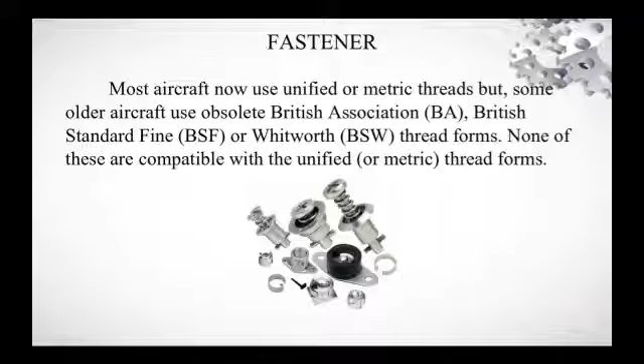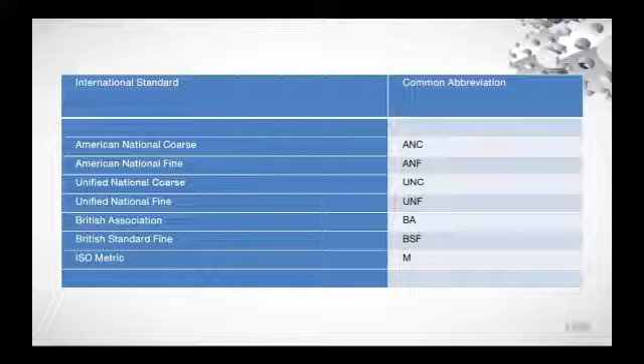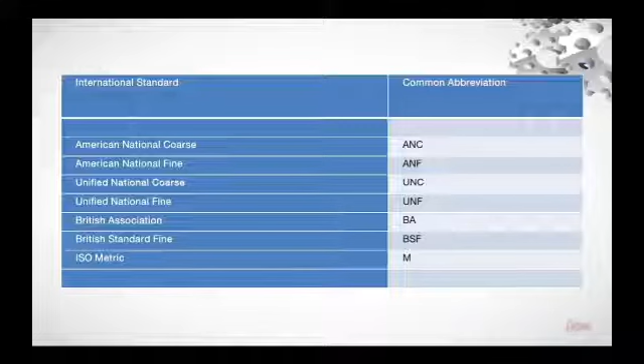Di bawah ini ada jenis-jenis standar dari thread. Yang pertama American National Coarse, American National Fine, Unified National Coarse, Unified National Fine, British Association, British Standard Fine, dan yang terakhir ISO Metric.

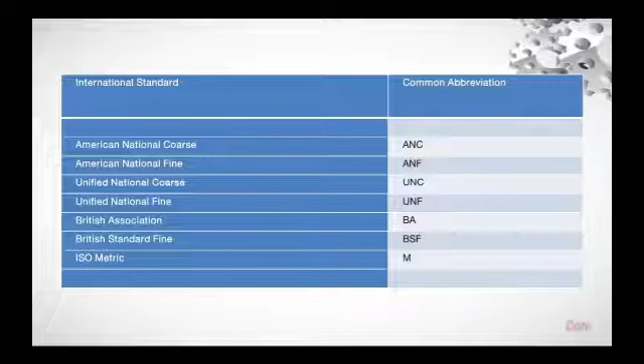The inclined plane and the helix. The value of the inclined plane as a means of transmitting motion is well known. Most aircraft components are assembled using fine threads on the various bolts, nuts, screws, and studs, which are then often further secured by some other mechanical process to reinforce their resistance to the effect of temperature change and vibration.

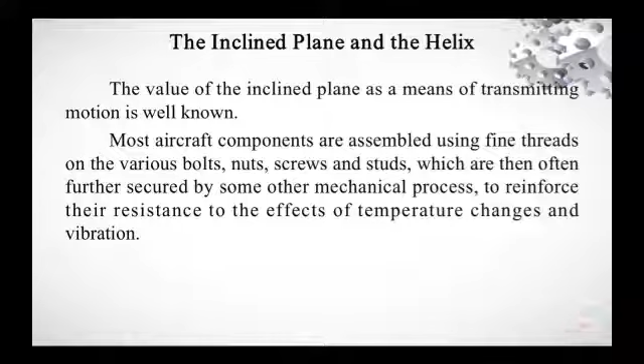Screw thread terminology. Screw threads are usually formed with clockwise turning, atau yang biasa disebut searah dengan jarum jam, and are referred to as right hand threads, menggunakan atau disebut right hand threads.

But there are occasions where the thread is formed with the groove spiraling in anti-clockwise direction, and in this instance they are designated as left hand.

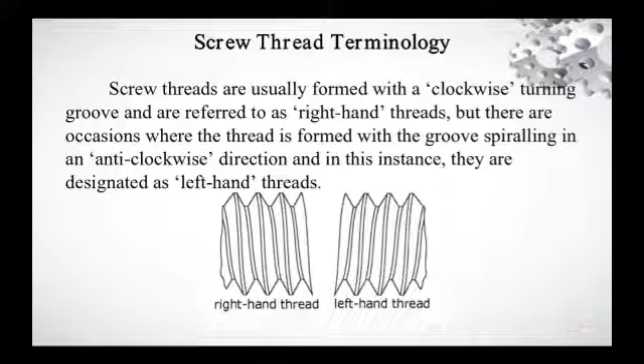Jadi ada dua jenis dari thread. Yang pertama itu clockwise dan anti-clockwise. Biasanya clockwise itu disebut dengan right hand thread dan anti-clockwise itu left hand threads.

Kemudian the following terms are used to define the characteristic of the thread. Jadi di bawah ini saya akan jelaskan bagian-bagian dari karakteristik thread tersebut. Screw thread, a ridge of uniform section in the form of a helix on the external or internal surface of a cylinder, or in the form of a conical spiral on the external or internal surface of a cone.

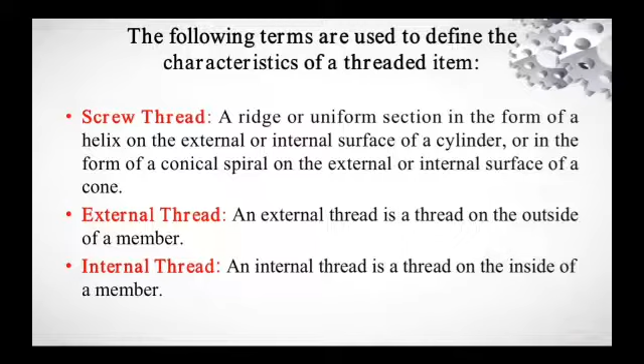External thread. An external thread is a thread on the outside of a member. Internal thread. An internal thread is a thread on the inside of a member.

Kemudian major diameter. Major diameter adalah the largest diameter of the thread of the screw or nut. The term major diameter replaces the term outside diameter as applied to the thread of a screw, and also the term full diameter as applied to the thread of a nut. Jadi major diameter ini adalah bagian terbesar atau ukuran diameter terbesar dari nut atau screw. Karena diameter itu terbagi dua, major dan minor.

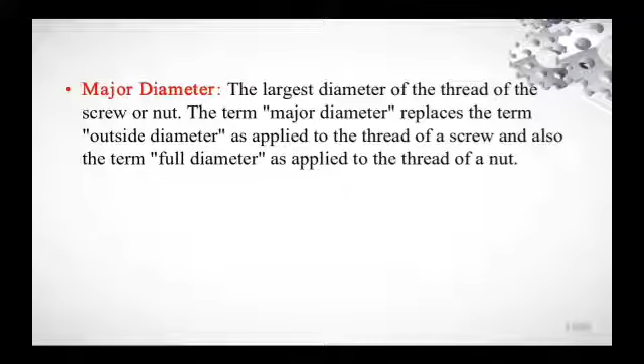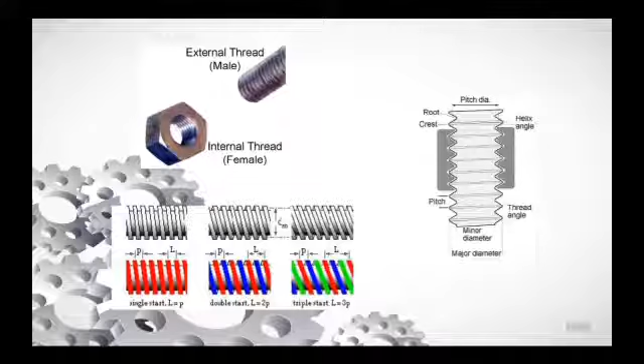Kemudian next. Minor diameter, the smallest diameter of the thread, measured at a right angle to the axis. Pitch, the distance from the center of one crest to the center of the next, measured parallel to the axis.

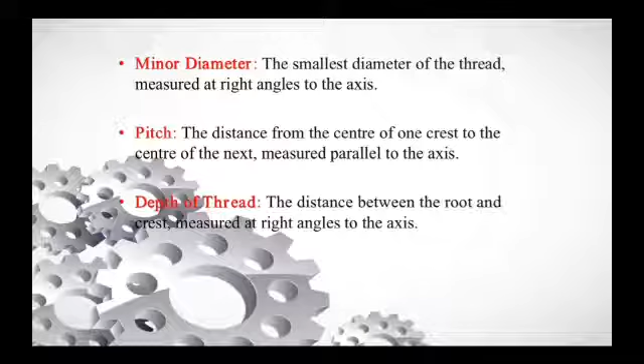Depth of the thread, distance between the root and the crest, measured at right angles to the axis. Half angle of the thread, atau biasa disebut the angle included between a side of the thread and the normal to the axis, measured in the axial plane.

Angle of thread, the angle included between the sides of the thread, measured in the axial plane. Helix angle, the angle made by the helix or conical spiral of the thread at a pitch diameter with a plane perpendicular to the axis.

Oke, bagian selanjutnya akan dijelaskan oleh Arvidi Ronofri.

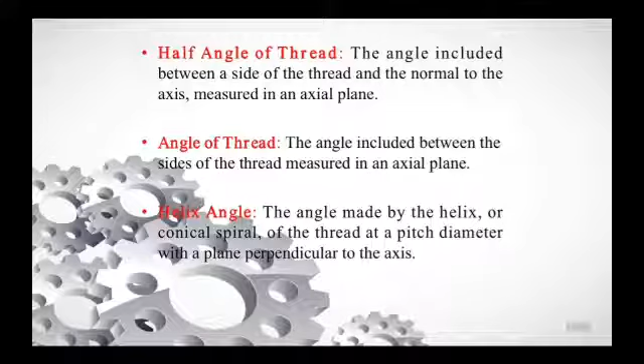Yang saya lanjutkan, selanjutnya itu ada crest. The surface of the thread corresponding to the major diameter of the screw and the minor diameter of the nut.

Terus yang selanjutnya ada lead. The distance a screw thread advances axially in one turn. On a single thread screw, the lead and pitch are identical. On a double thread screw, the lead is 2 times the pitch. On a triple-head screw, the lead is 3 times the pitch.

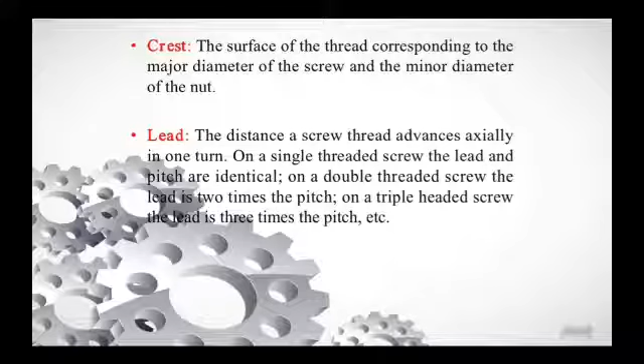Next, root. The surface of the thread corresponding to the minor diameter of the screw and the major diameter of the nut. Side or flank. The surface of the thread which connects the crest with the root.

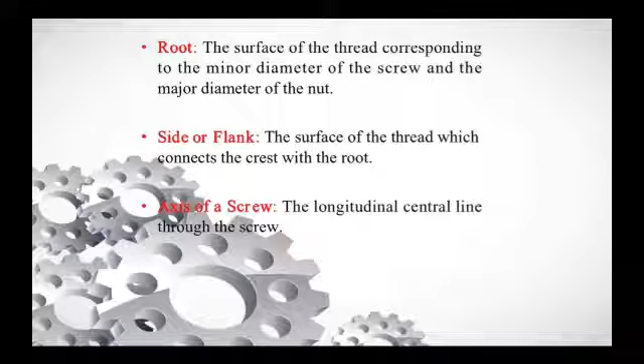Next, axis of the screw. The longitudinal central line through the screw. Base of thread. The bottom section of the thread, the greatest section between the two adjacent roots. Depth of thread. The distance between the crest and the base of the thread, measured normal to the axis.

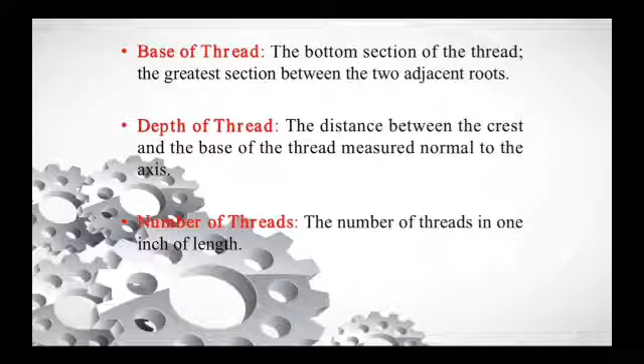Number of thread: the number of threads in 1 inch of length. Length of engagement: the length of contact between two mated thread parts measured axially. Depth of engagement: the depth of thread contact of two mated parts measured radially. Lead: the distance a screw moves axially in one complete turn.

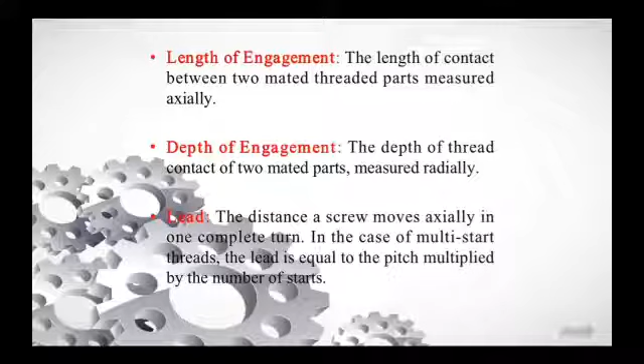In the case of multi-start threads, the lead is equal to the pitch multiplied by the number of starts. Single start thread is the term used when there is only one screw thread cut in the material. Multi-start thread consists of 2 or more separate parallel threads cut into the material, carrying the thread run out, which is the part of the thread where the minor diameter increases until it equals the major diameter and merges with the plain portion of the shank.

Di bawah ini ada sedikit rumus. Note that lead atau L sama dengan pitch P dikali start.

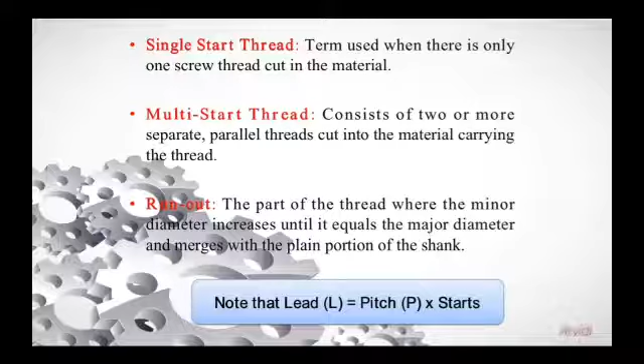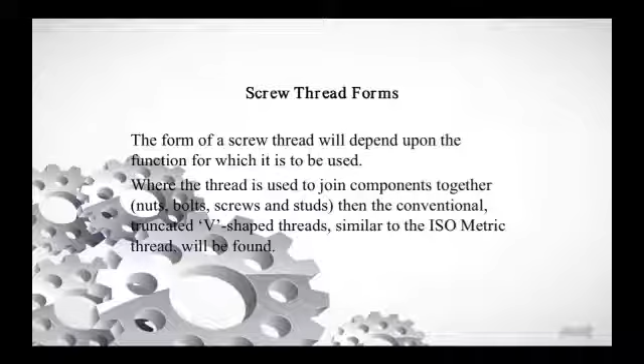Selanjutnya ada screw thread forms. The form of screw thread will depend upon the function for which it is to be used, where the thread is used to join components together, example nuts, bolts, screws, and studs. Then the conventional truncated V-shaped threads, similar to the ISO Metric thread, will be found.

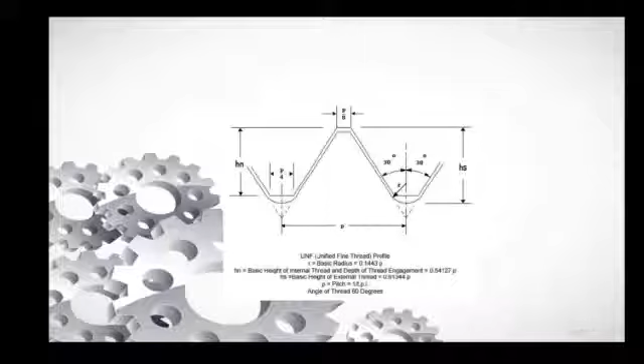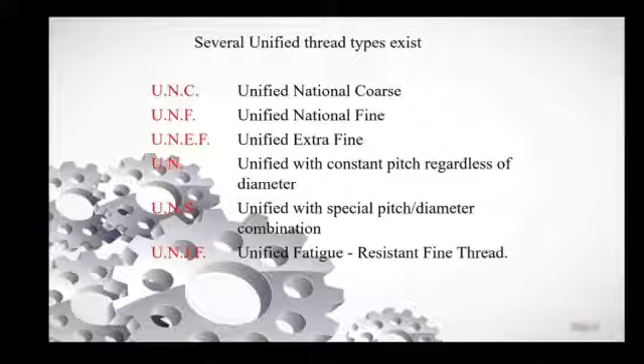In an attempt to provide a common standard, Canada, the United States of America, and the United Kingdom adopted the Unified System of Thread. Several Unified Thread types exist: Unified National Coarse, Unified National Fine, Unified Extra Fine, Unified with constant pitch regardless of diameter, Unified with special pitch or diameter combination, and Unified fatigue resistant fine thread.

Other thread forms. Some specialist threads are used whenever force needs to be transmitted, such as in a lead screw or a vice. These include the following.

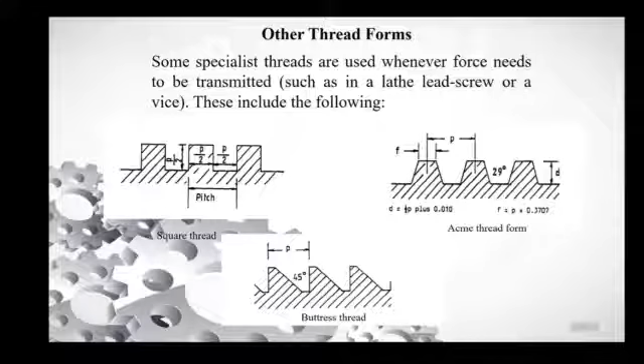Classes of thread. The different thread classes have differing amounts of tolerance and allowance. Classes 1A, 2A, 3A apply to external threads. Classes 1B, 2B, 3B apply to internal threads.

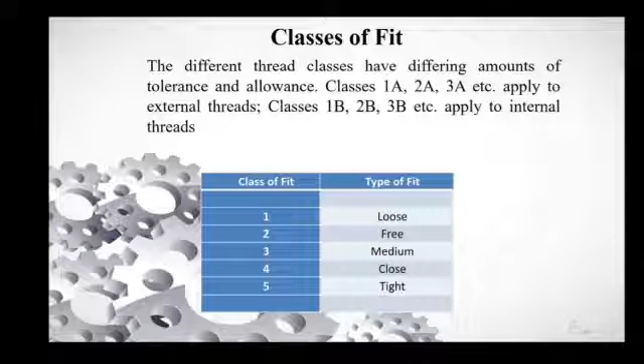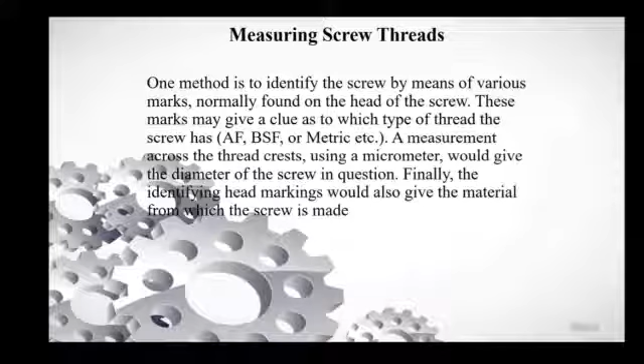Next, measuring screw thread. One method is to identify the screw by means of various marks, normally found on the head of the screw. This mark may give a clue as to which type of thread the screw has, AF, BSF, or metric. A measurement across the thread using a micrometer will give the diameter of the screw in question. Finally, the identifying head marking will also give the material from which the screw is made.

The profile gauge can be used to ensure that the tool which is cutting the thread is of the correct type. The pitch gauge can be used to find the thread size by simply fitting the various blades of the gauge against the screw thread until a match is found.